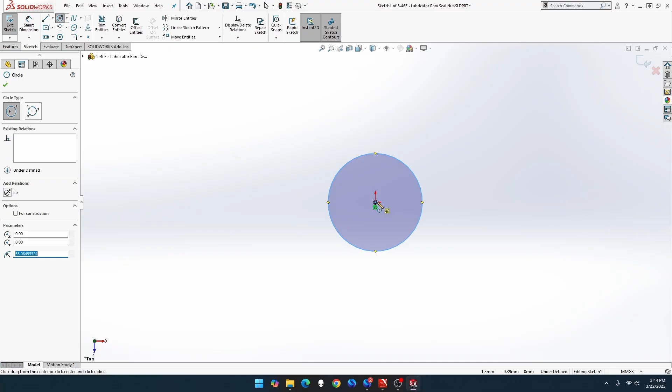Right, let's go top, sketch, circle. We're going to do 2 circles. They're going to be 5mm and 12mm. So the other one's 12. Well, it might just be the way around. That'll be interesting.

5. Double check 12mm. That's going to be straight on the outside. So that's going to be extruded by 8. And done. Now we want to go.

Let's do the thread first. Then we've got to do a slot through there. I can do the slot last, that way it doesn't stuff the thread up.

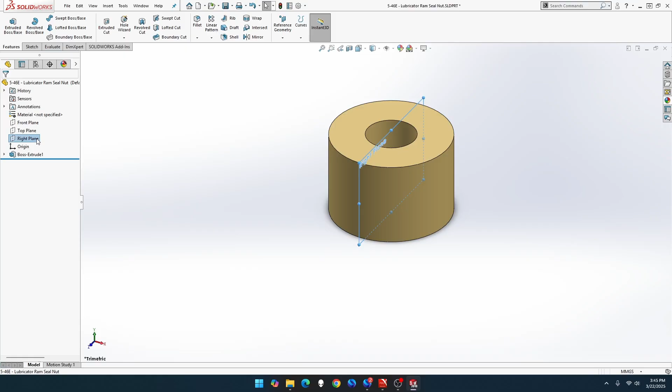But first, let's go to right view. Actually, cancel that. Normal To first, then right view.

There we go. So we want to do construction line. Now, it didn't matter that it's centered on the mid-plane, not when I've done that. Normally I do that, but just didn't this time. So now we go out of that sketch.

We want to go reference geometry, plane. Click on the construction line. Click on the endpoint. We'll put that one there. Perfect. And we're going to do that again. Plane, click on the construction line, but click on this point here.

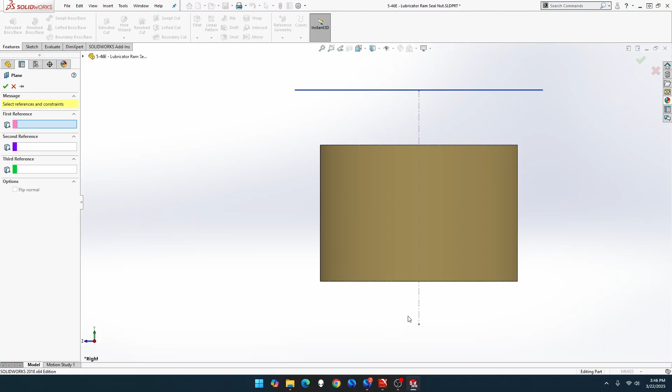Oh, hold on, cancel that. Let me make sure nothing's selected. Plane. There we go. I think I had something selected, that's why it went weird. I think that was still selected.

And okay, there we go. Now we want M12 threads. Let's go to Hole Wizard thread. It's going to be M12, not 18. We want 12 by 1.25. There we go.

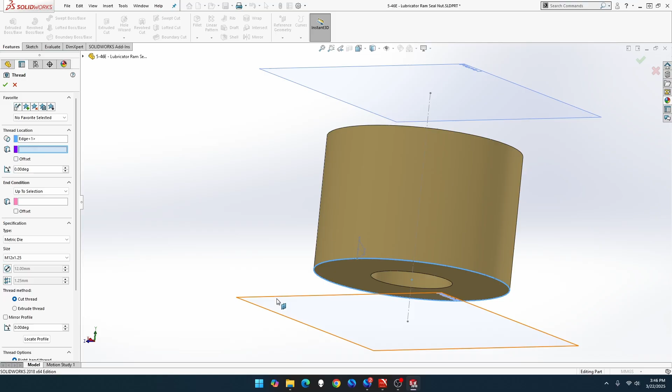We want that circle, could be that one or that one. I'll pick that one. End. We want there to there. And that's going to be extrude thread - nope, cut thread, my apologies. There we go. Look at that. Beautiful, exactly what we wanted.

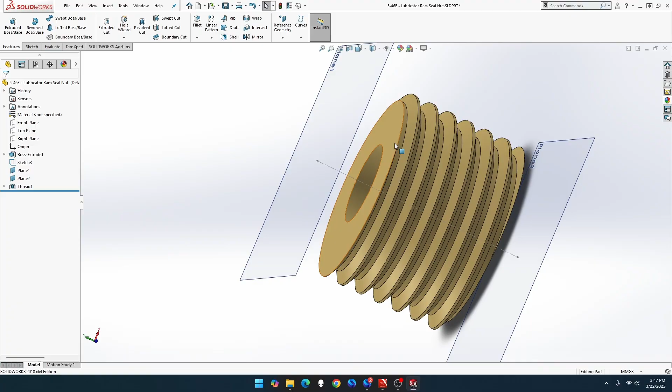Yep, so it goes round and no bits stopping it. So that's good. So that's now hide that one. Hide the 2 planes, we don't need them anymore. Do not delete them, otherwise you lose your reference. And hide that one. There we go.

Now we want to go front plane, normal, sketch, and we're going to do a square if you want to go either. Actually, we might do center rectangle. Where's the center point there?

There we go. The reason I'm doing it that way, I know high enough, I'm going to trim everything. Now it's going to be 2mm wide. Oops, measurement, thank you. 2mm wide. This center point will line up with the reference there, the 0. That's going to be vertical. Now it's going to be, how high is that? 1.5. So smart dimension, and that shows it completely done.

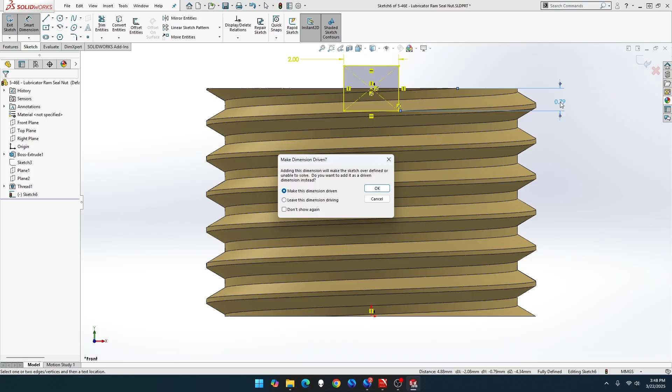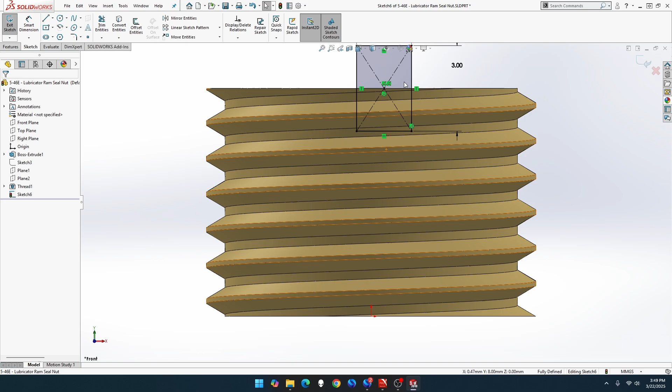We want that line there to that line there. It's going to be - let's go back one. Let's change that to, yeah, it's 1.5, but because we've got above that, it's going to be 3. There we go. Now if we do that point there - actually, we can't move that sideways, can we now? No, we can't, it's actually locked in. Oh, interesting, okay, done it automatically.

Now, because that's in the middle there, we go features, extruded cut. We want through all, second direction, through all, and done. There you go, see thread there. Now, if we had that missing, it may screw the thread up.

And that's pretty much all that piece is. Nice, let me put that with. Looks nice. That's part 5-46E Lubricator Ram Seal Nut for the Clayton Undertype Steam Wagon done.